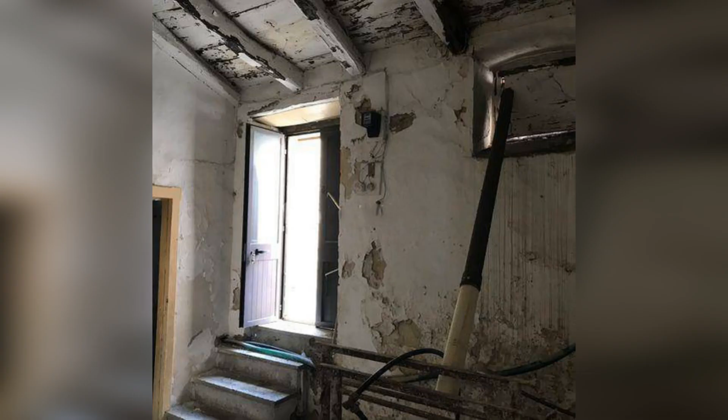As you enter, you can see the water pipes on the left. I think you could have a bathroom here. And in the small room there is an old cooker like this. This will be the kitchen.

In the description it was stated that this house has 27 square meters of living space, but unfortunately I don't have the exact size of the rooms, so when designing we will be guided by photos.

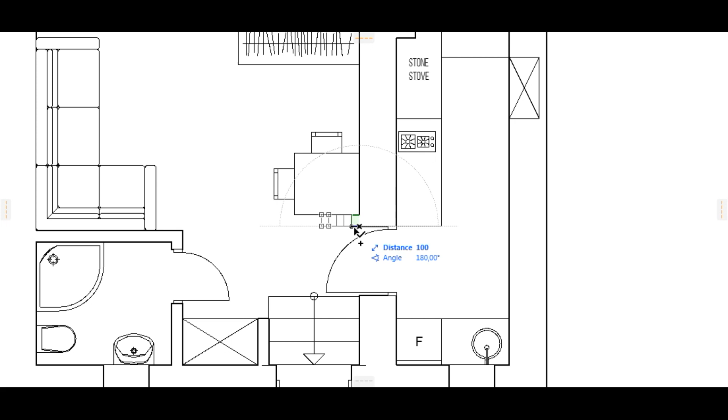The layout of the house turned out to be compact, but at the same time quite comfortable. All living areas are maximally isolated. Of course, the living room and kitchen are not enough light, and I will solve this problem by adding windows in the roof. So let's see how it will look like and start modeling.